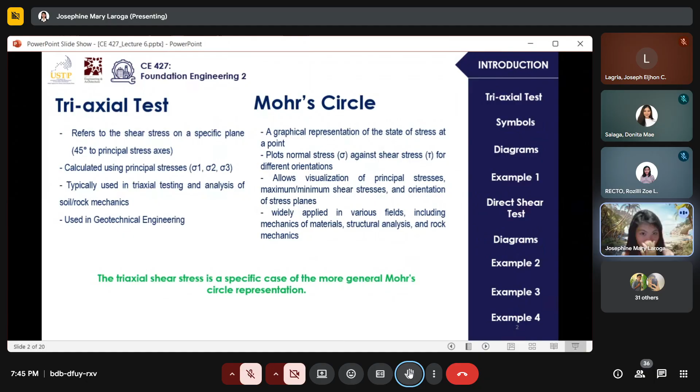Next is for Mohr circle, difference niya, it is a representation of stress at a point. So si triaxial test, ang iyang gina-represent kay ang shear stress, while si Mohr's kay stress at a specific point. So wala gi-specify if unsa siya nga klase nga stress. And then plot normal stress against shear stress for different orientations. Then allow visualization of principal stresses, maximum, minimum. Actually, similar rin siya. Mas specific lang si triaxial test kay more on sa soil man imuhang gina-consider.

Now, triaxial stress refers to a state of stress where a material is subjected to three mutually perpendicular principal stresses. We have sigma 1, major principal stress, sigma 2, intermediate principal stress, and sigma 3, minor principal stress. The triaxial stress is a measure of shear stress that occurs on the planes oriented at 45 degrees to the principal axis. And in a triaxial test, a cylindrical sample is subjected.

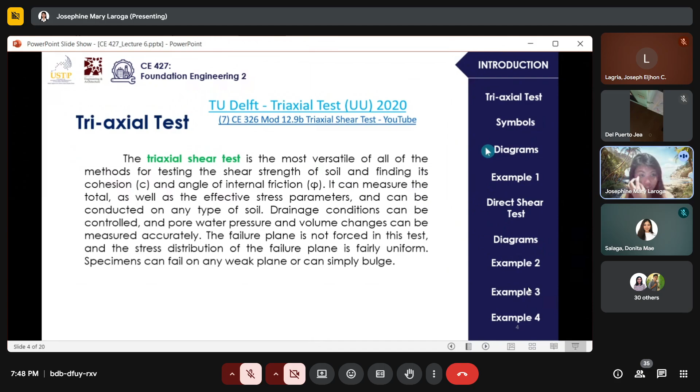So the three primary triaxial tests conducted in the laboratory each allow soil response for differing engineering applications to be observed. These are unconsolidated undrained test.

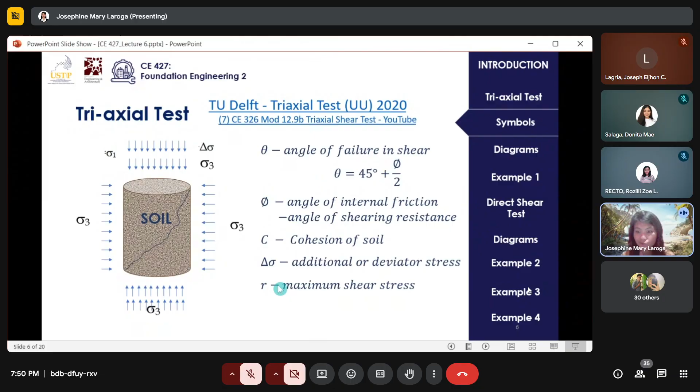Again, you will encounter a lot of problems that specify the minimum principal stress, minimum normal stress, confining pressure, lateral pressure, radial stress, cell pressure, chamber pressure. They're different names, but it's just one thing. That is your sigma 3.

And then sigma 1 is actually your maximum principal or your maximum normal or your maximum axial stress. So that is sigma 1.

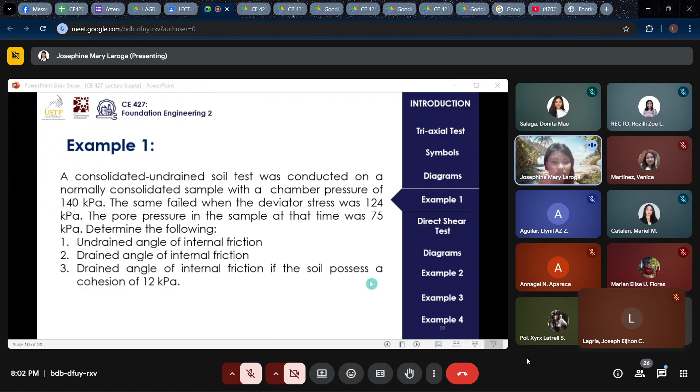Right. So example number 1 for undrained angle of internal friction. So as you can see here, we have sigma 3, and our deviator stress. As mentioned by your classmates, sigma 3 is 140, deviator stress is 124. And then, para makuha si sigma 1, you just need to add the two values. So, add mo, you get 264.

Then, for the radius, asa gikuha ang radius? Since this one is one point of the circle and another, so semicircle siya. This is your diameter, right? This is the diameter of your circle. 124 iyang length. So all you need to do to get the radius is just divide 124 by 2. So you get 62. And this line from the origin of your circle, this is 62 as well. And kani siya diri, 62 na siya.

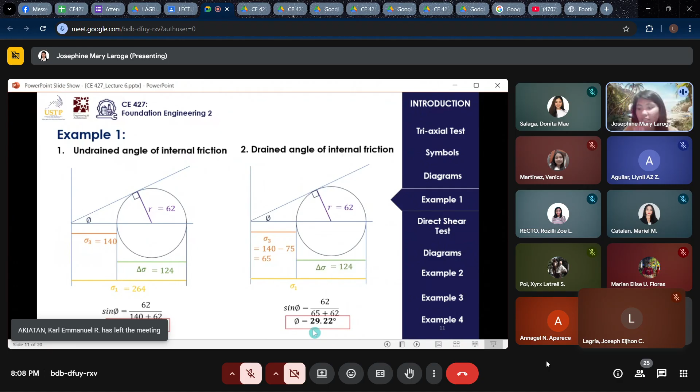140. Okay, so we get sigma 3 of 65. Same equation. Lahi lang ang value, 65, 124, plus 62. You get 29.22 degrees. Now for drained angle of friction, if the soil possess a cohesion of 12 kPa. How will we solve this?

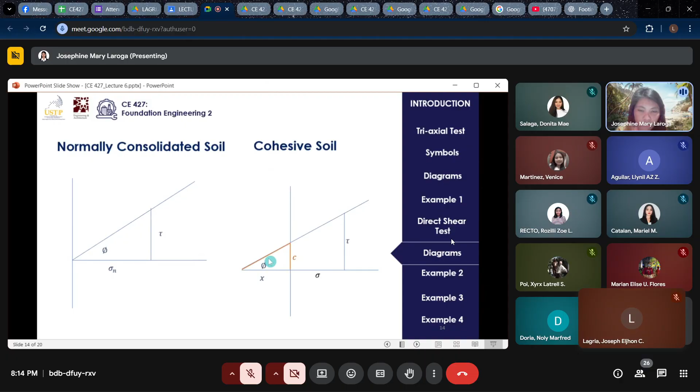Then, by the way, we have your stress here and the value of x. Same gyapon. This is your angle of internal friction. Then, for example, number 2, let's have Meril Roshel Pedrosa read example number 2.

In a direct shear test, the soil was determined to have an angle of internal friction of 31 degrees and cohesion of 26 kilopascal. If normal stress is 150, determine the following. First, the total shear stress, and second is force required to cause failure in shear when the sample has a dimension of 50 millimeters by 50 millimeters and height of 75 millimeters.

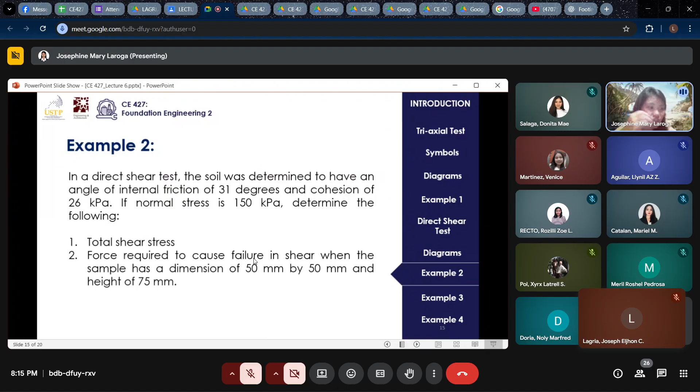Okay. So, gi-mention man nga normal stress is 150. That is actually the value from here. Here, normal stress. It will always start from the origin. So, 150 daw. And then, internal friction, 31 degrees. Okay. Then, cohesion, given po, 26. Okay. So, naa man nato tanan ang given, right? Total shear stress ang gipangita.

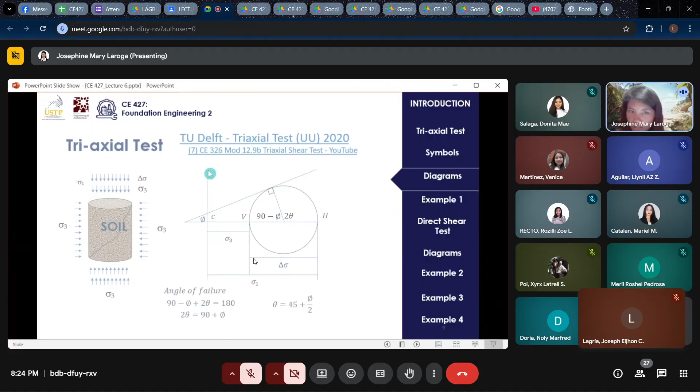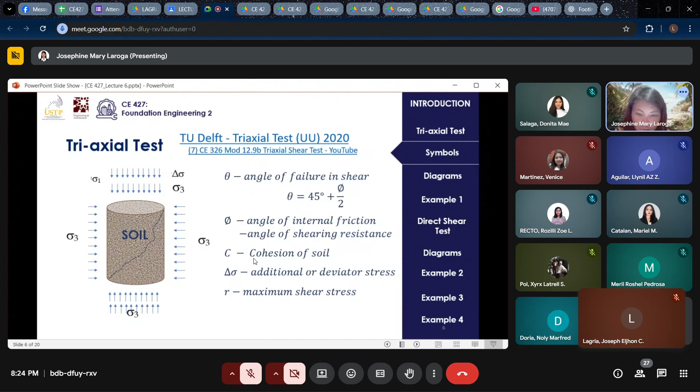Okay, so R is maximum shear stress. Right siya. R is maximum shear stress, and then normal, no, not normal stress, but shear stress at failure is mo ni siya. Okay, so don't confuse your maximum sa imuhang shear stress at failure.

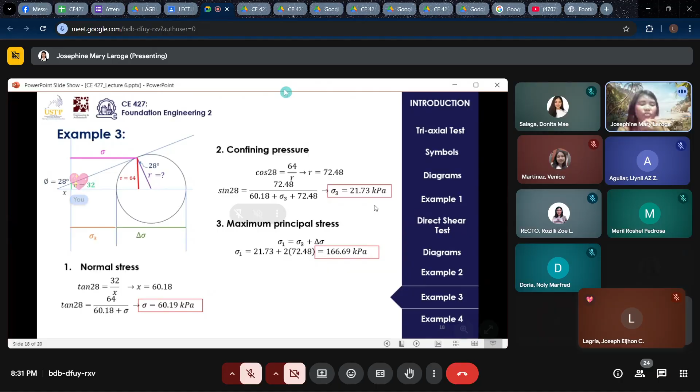Okay, so murag wala raman tingali mo questions. Let's continue to our last example, which is example number 4. Find the maximum principal stresses, minimum principal stresses. Actually, dili na siya part sa atong lesson since more on Mohr circle na siya. Dili na siya shear or direct shear. So, para ni siya initial idea lang sa inyo sa calc tech.

So, kuhaon nimo imong calculator. You can try it right now. Get your calculators and then click mode 3-2. So, naa tay given nga diagram, di ba? Kuhaon nato si maximum, si minimum, si maximum shear stress, ug si center. So, para makuha si maximum principal stress, click mode, then 3-2. Then, input dayon ang values sa imuhang points.

Kani siya, pila man ni siya? That is 90. Actually, pwede nimo i-baylo ang points. But since kani siya naay A, so kani ang point A. Imuhang X and Y coordinate: X coordinate niya is 90, Y coordinate negative 40. This one, X coordinate is 30, Y coordinate is positive 40. Okay. So, tuplokon nimo ang S variation that is in your apps.

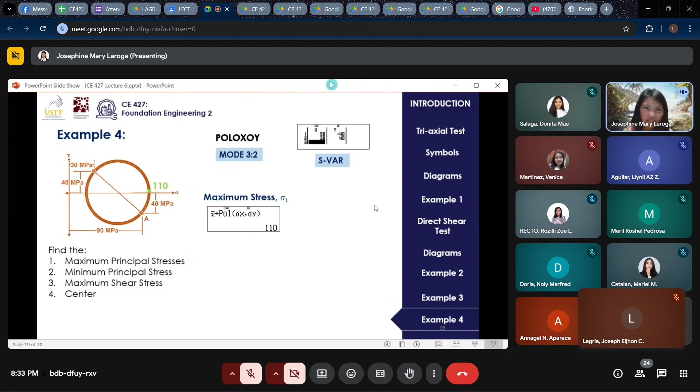Okay. Actually, ako na lang ipakita, no? Para di na lang mag-imagine. Oh, no. Why is my emulator not working? Wait lang. Ayun, lumabas din. Let me present my whole screen. Click, and here we go. Can you see my screen na? Ayan.

Okay. So, mode 3, 2 is linear. So, 90, 30. This is negative 40, and then 40. Apps, S variation or S var. And then maximum shear stress. This is to get the maximum shear stress pa lang ni class ha. That is 2. Na-save na to. Then, S var 2 plus, apps 5.

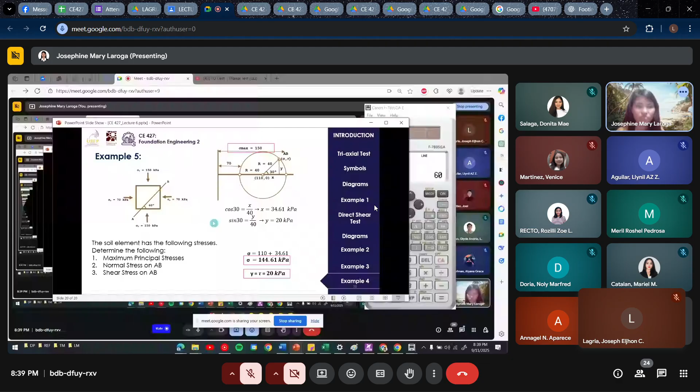Okay. Example number 5 naman hinuon ni. I won't discuss this one na. More on sa mechanics naman gud ni, but I will still give you the PowerPoint, no? Included gyapon ni siya sa PowerPoint. So kindly study this one. So I believe that's the end of our lecture for now. Do you have any questions? Gets lang ba?

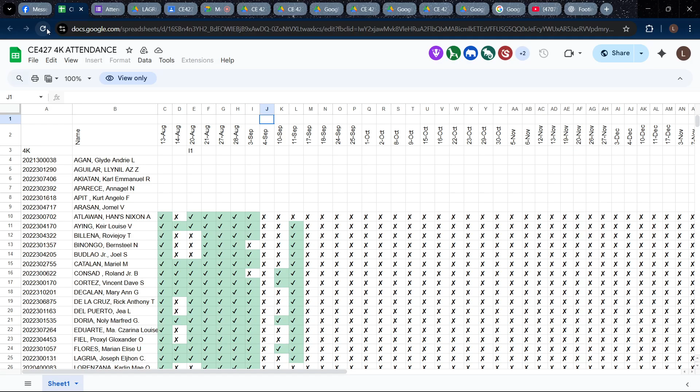Ma'am, on behalf of our class, since many have PM'd, is it okay if there's an extension for laboratory 3 and 4? Laboratory 3? Practice problem. Yes, I mean, sorry. Practice problem 3 and 4. Sorry ma'am. Practice problem 3 and 4. When is the deadline I set? This Sunday. This Sunday. May I ask why?